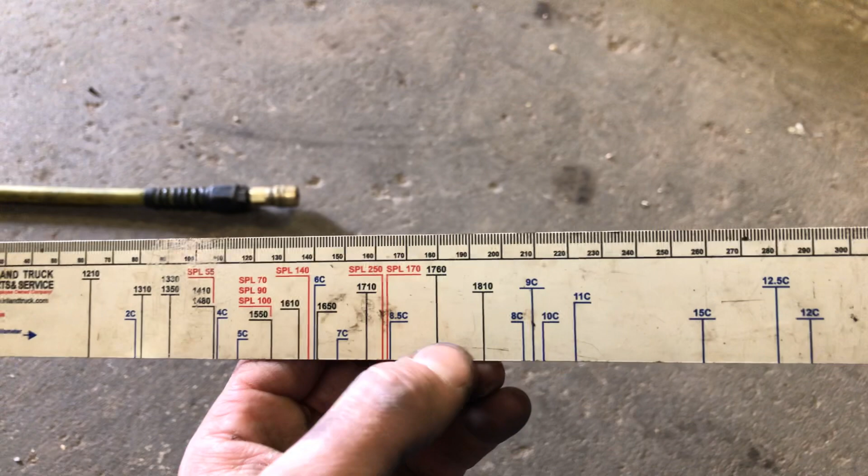So we will start from abbreviation. What size of U-joints exist? As you can see, there's 1210, 2C, which I've never seen one, 4C, etc. On the modern trucks it's 1810, 1760, then SPL 170 and SPL 250. This is the most modern one.

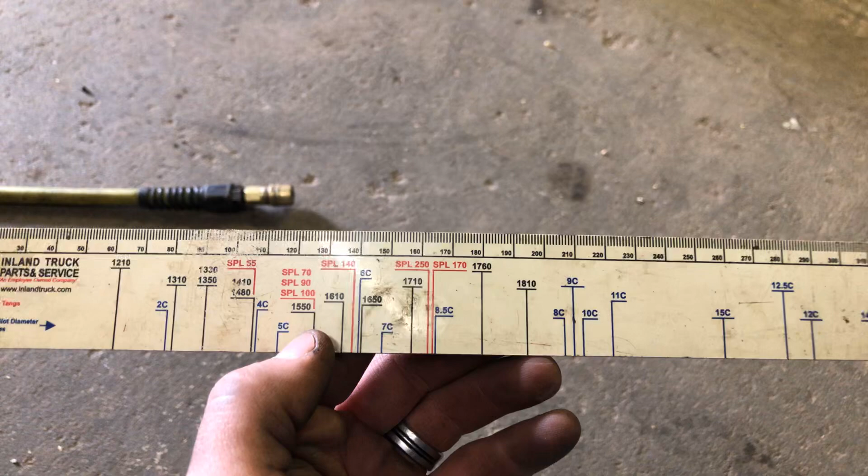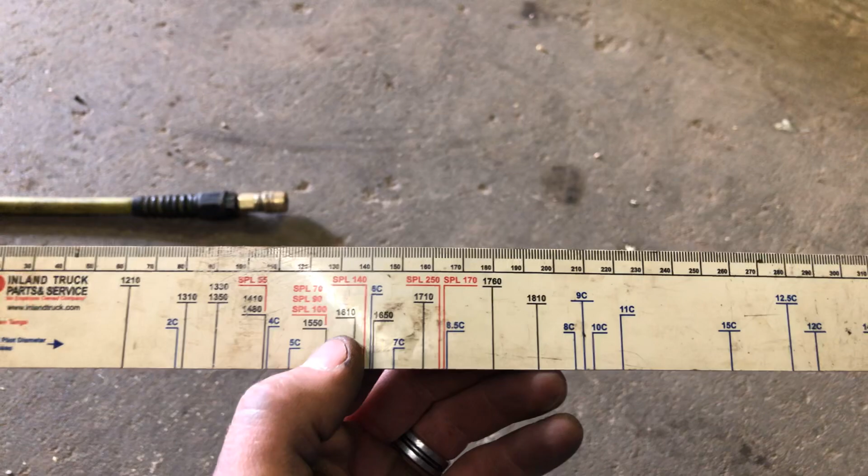If you go to 1550 or 1610 or 1650, this is older trucks, like I'm talking about early 90s, late 80s. That's when they used to use smaller U-joints, the reason being there was a lot less torque on the engine, so they didn't run such heavy U-joints. Then they have 1000 and, as you can see, a lot of them.

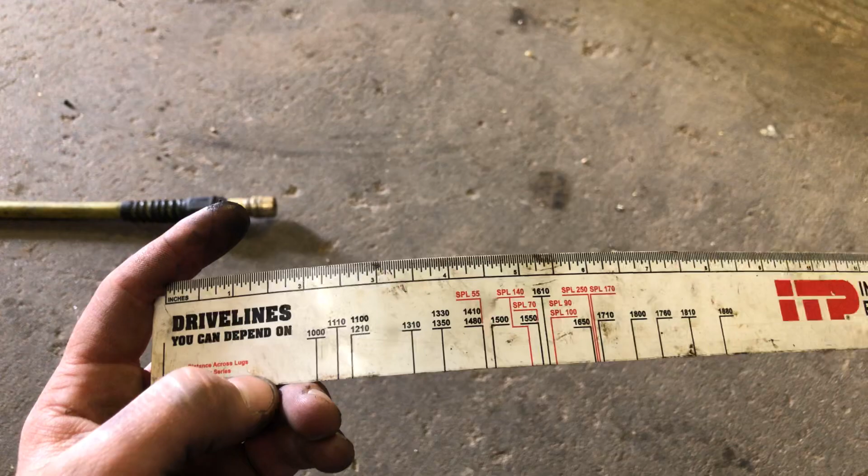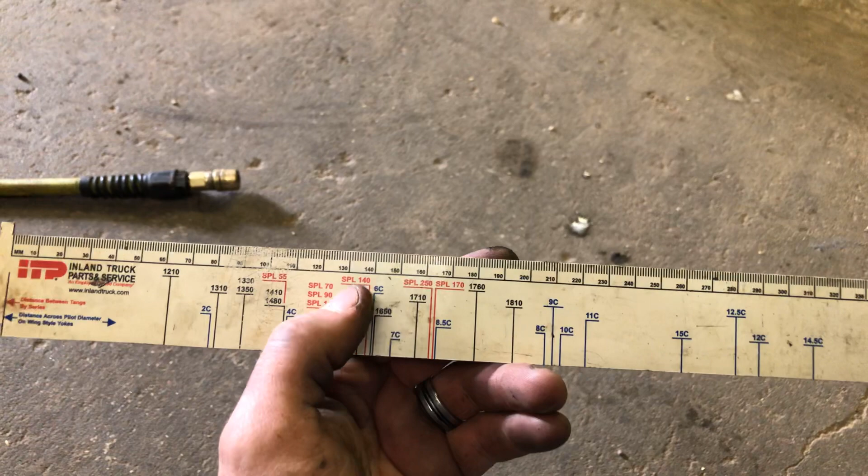This company, ITP, I used to work for them, Inland Truck Parts. I think you guys are familiar with them. They specialize in this kind of U-joint. So this ruler, U-joint ruler, that's where I got it from. You can buy one, but unless you do mechanical work constantly, you don't need one. But this is just an example of how many different sizes of U-joints there are.

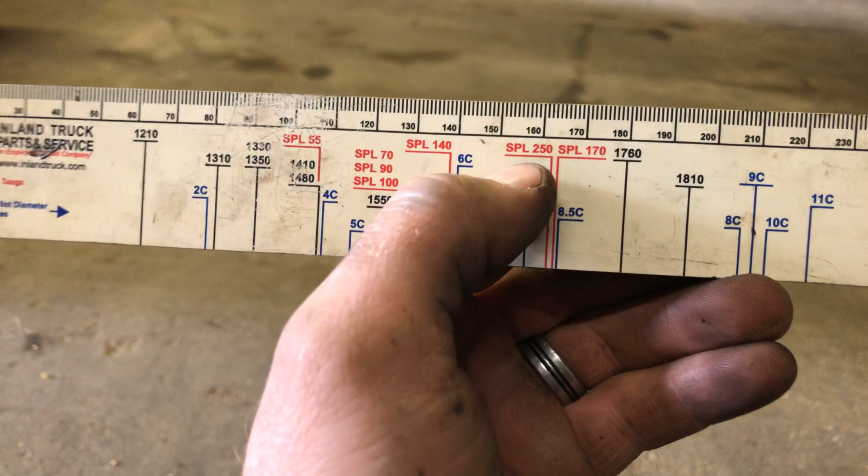So the 1810 and 1760, that's usually how it works. Usually the 1810 U-joints run from the transmission to the front differential. And then the drive shaft in between the axles would run 1760. If you have a truck with an SPL 250, they will run from the transmission to the front differential, and then SPL 170 will run in the in-between shaft. These are, I think, mainly the most common ones.

Mack used their own little different U-joint. They look like a butterfly U-joint kind of deal, but I'm not going to go into detail on those. Volvo is using SPL 250, a lot of them, and SPL 170. Kenworth and Peterbilt are kind of mixed. They use 1810s and SPLs and 1760s.

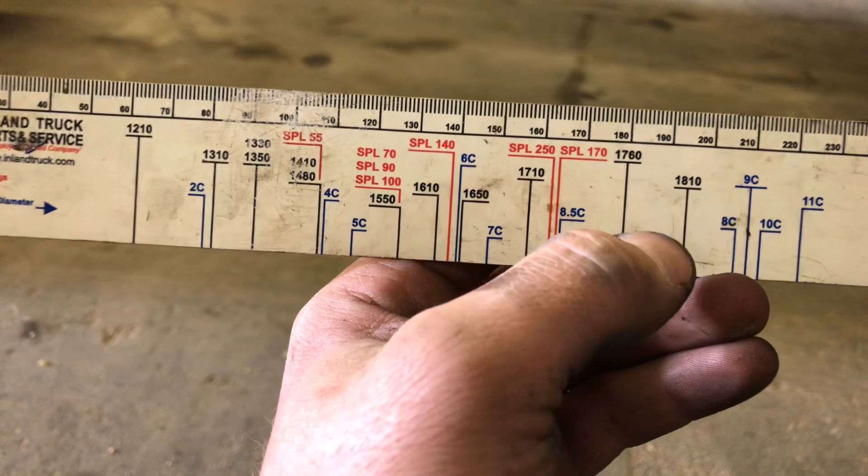So the way to tell the difference between, let's say, an 1810 and an SPL: the SPL U-joint is the one that will have really, really big caps, like they are fat. In my opinion, this is the most reliable driveline. First of all, they don't fail as much. Second of all, they're built so much heavier, and their U-joint is just giant. SPL 250 is a really big U-joint. 1810s are big compared to like 1650 or 1610.

But I prefer to run an SPL in my opinion, but they are a lot more expensive to maintain. The U-joints are a lot more expensive, and the driveline's a lot heavier. But I have 1810. I live with it. It's just a personal preference. That's what the truck came with.

Before we determine anything, I have spare U-joints over here for my truck, which is 1810, as you can see on the ruler, and then 1760s. So this size will run between the axles, and this size will run between the transmission and an axle.

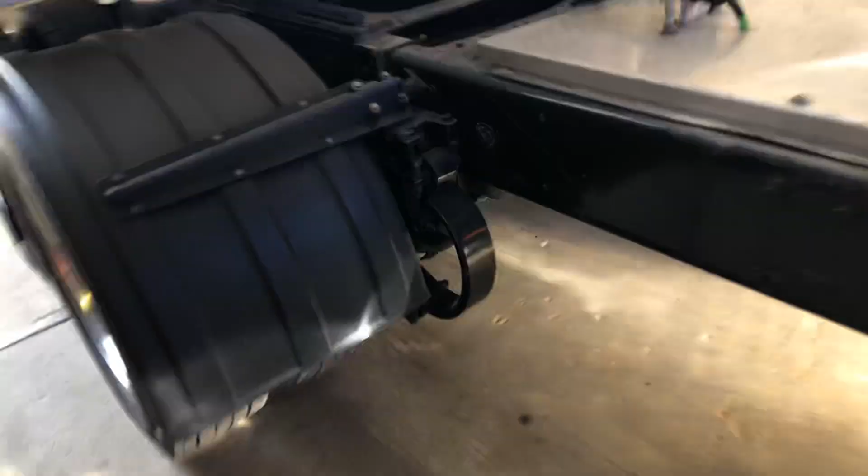How do you determine if the U-joint goes bad? There are two different styles. There's a full round, which this is, and there's a half round. Usually when you buy a U-joint, you say, I need a half round. Any kind of half round will come with one full cap, like this, that gets pounded in, and then this one will come with a strap and 2 bolts. That's what the half round and full round look like. I suppose you guys can tell the difference.

On a half round, it's easy to determine if the U-joint's going bad. This step on the cap will start polishing itself if it starts spinning inside. You do not want to run it for too long because it will wear into your yoke, and then you would have to replace the yoke.

Anytime, let's say for some reason you end up taking a drive shaft off, I recommend using new bolts and new straps. You can buy just new straps. Obviously, on this one, if you're really careful, you can disassemble and reuse them as long as the needles don't fall off inside.

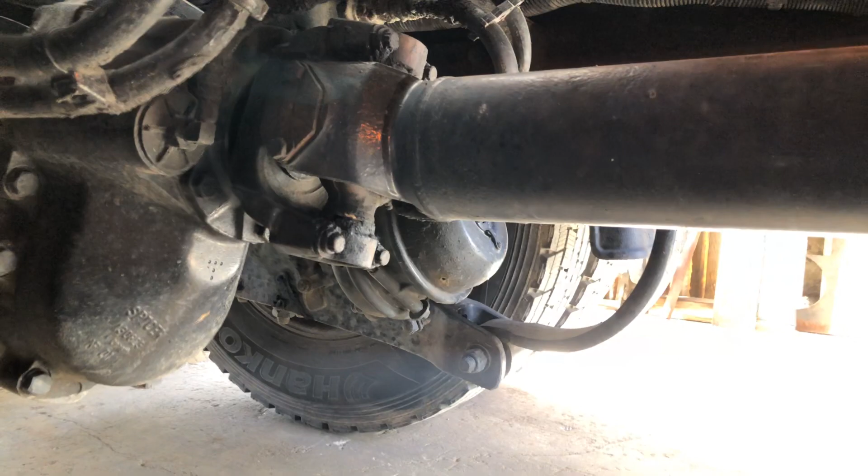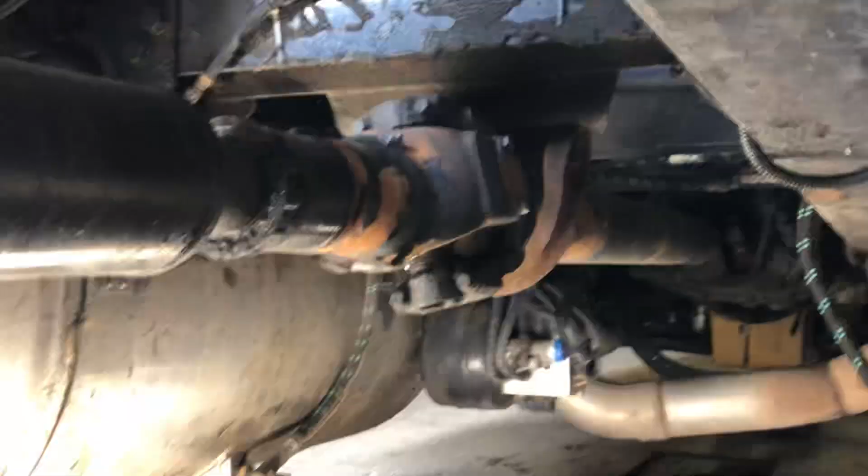Can U-joints create vibration? Yes. If you have a bad U-joint, it can create a lot of damage. First of all, they can destroy that seal right here behind this yoke and a power divider. They can knock your carrier bearing out too. I've seen that happen before. Some people call it the shaft in between. This is the shaft in between.

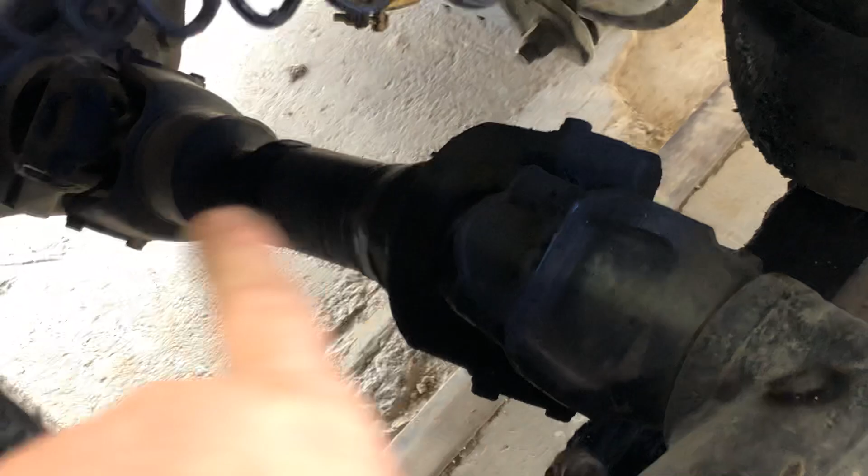Why do the U-joints go bad? I think number one is lack of grease. The proper way to grease the U-joint, some people disagree. I don't pump them full, till the stuff starts coming out. Spicer themselves and Neapco, U-joint company, anytime you service a truck, they want you to grease the U-joint to that point so the old grease will come out from a U-joint, the new grease starts coming out around the seals. I think it's too much.

I usually pump them full enough till you hear the grease start crackling. So lack of grease is number one. Using proper grease too, not the cheap grease that has no silicones or any kind of lubrication stuff. Believe it or not, those U-joints go through a lot of stress. Let me grab one U-joint real quick.

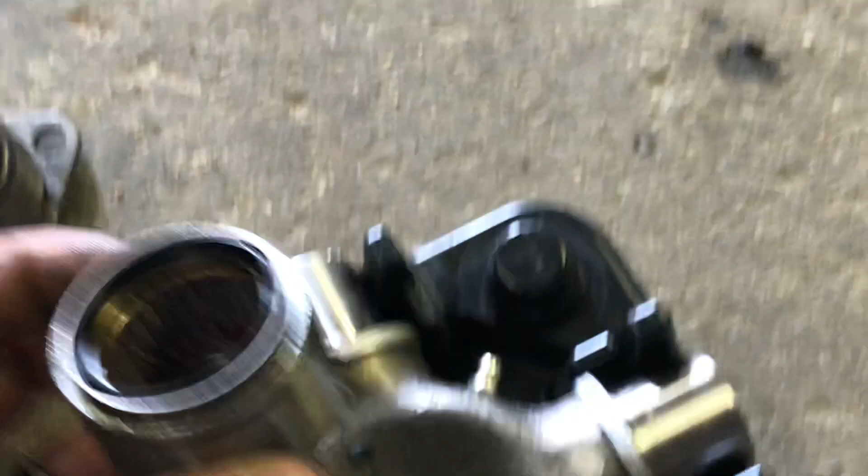So that's what a full round cap would look like. There's a bunch of needle bearings. The problem is when you disassemble them, you have to pull this cap off from a drive shaft. And if you lose one, it goes bad. This is a half round U-joint. Basically same thing. They still have needles, but they hold on by the strap, this kind of strap like this. That's what I was showing you guys.

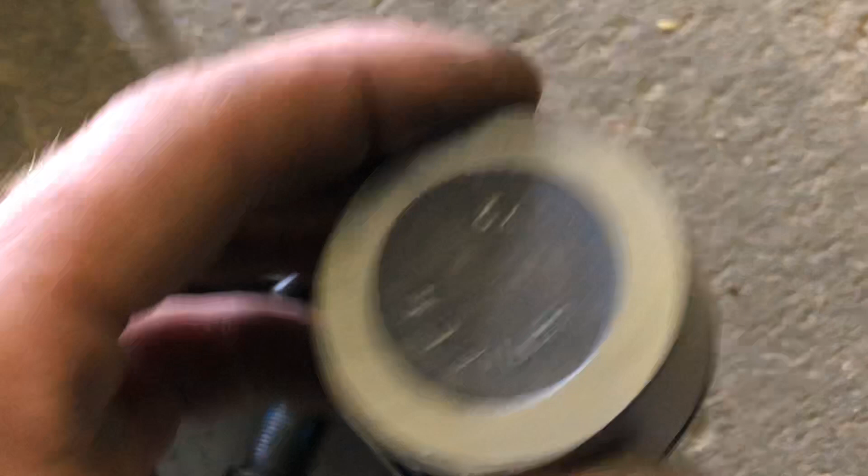This is very important. When this starts getting polished, that means your cap starts spinning. The cap's not supposed to spin when it sits in a drive shaft because the strap's supposed to hold tight against it. And like I said before, if you let it go for too long, this cap will start wearing in your yoke or your drive shaft, and then you will have to repair your driveline, obviously repair the yoke and the U-joint.

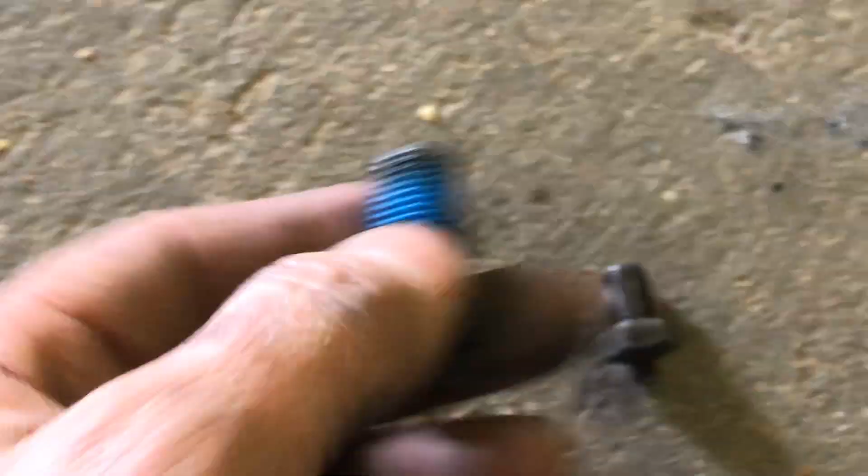This bolt, this will be for the full round side. This is half round side. They do come with the blue Loctite, and this one comes with the red Loctite. I don't think it's enough Loctite. I end up using Loctite on top of it.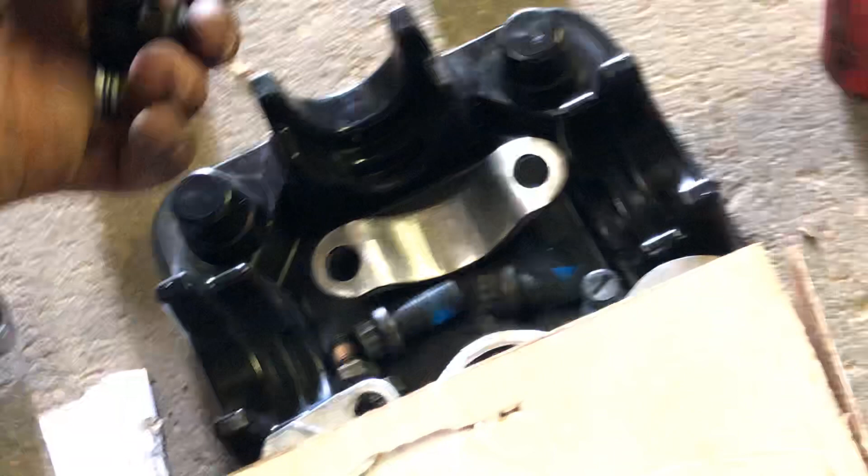Anytime I put a new U-joint or old U-joint, let's say for some reason I took the drive shaft off, like I said before, and you end up reusing your U-joint, I always use new caps, new straps, and new bolts. And you put more Loctite on top of this Loctite. I don't think it's enough. So that's basically it. I think I got the basic principle of maintaining a U-joint.

Forgot to tell you guys, another reason why the U-joints can fail is not the right angle on an air suspension. If you're too high, your drive shaft goes too big of an angle, and if you're too low, it's going too flat. It kind of hurts the U-joint too. Volvo, Peterbilt, Kenworth, Mack, they all have numerous suspensions, and the correct name for it is the suspension height adjustment. So it's got to be properly adjusted.

When you're running down the road, the angle of the drive shaft's got to be, not exact, but in a certain spec. Like I said, if you're running too high, like your airbag stretched way out, you can knock the U-joint out, seals, bearings, and a differential. You can create a lot of troubles. Knock the carrier bearing out. God forbid you ruin the back housing of the transmission too. If it runs at too big of an angle, it starts vibrating. So that's the main causes why the U-joints go out.

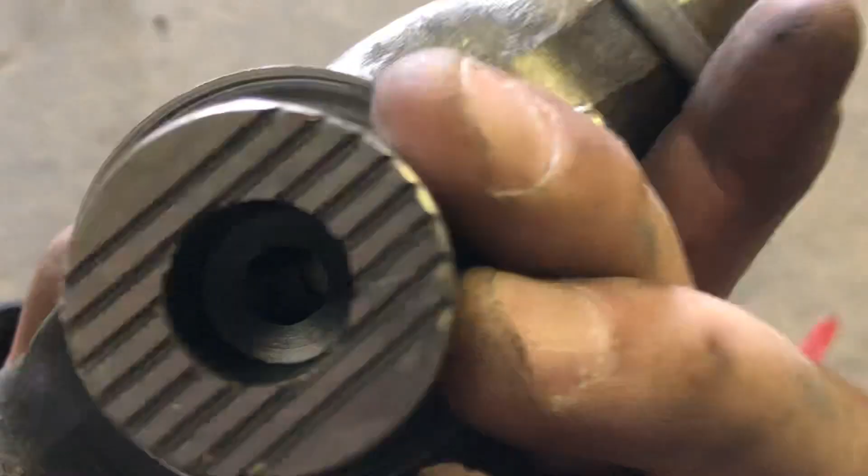I think the grease is the biggest deal. A lot of them get under greased. I don't think there is such thing as over greasing the U-joint or anything on the truck, besides the throwout bearing on the clutch; if you over grease it, then it's hard to put in gear. But the U-joints, pump them full of grease. Anytime you put a new U-joint in, you want to fill it up with grease. New U-joints don't come with too much grease, especially spiders. Some do more than others, but anytime you put a new U-joint in, you want to pump them full of grease. So anyways, that's all I got.